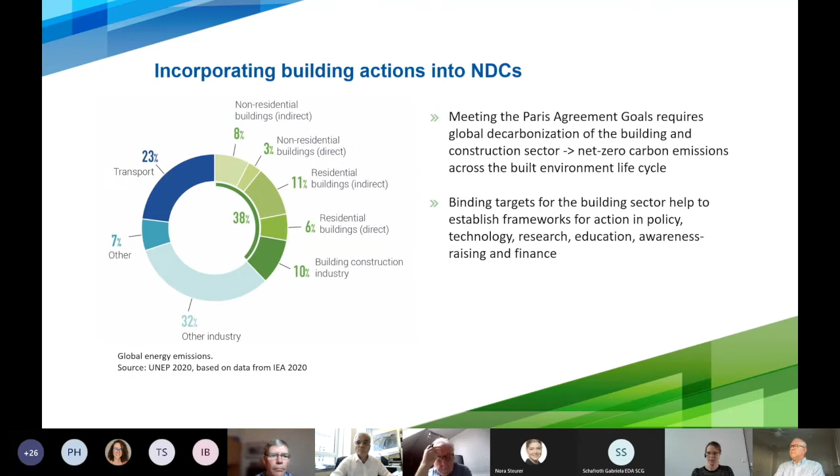So the relevance is given, and it really provides the opportunities—these NDCs—to somehow provide a framework for policy action and for different measures, which we are also highlighting later in this publication of the 10 key measures.

What are we looking at? As I said, we are looking at 5 key areas, depicted here in this landscape. The 5 key areas are new buildings, existing buildings, building operations, building materials, and resilience.

Why are we addressing these 5 ones? If you're familiar with the products of the Global ABC, usually we have like 8 key areas, also with the other ones being urban planning, appliances and systems, and clean energy.

We really wanted to focus on the ones on transformative action related to the building itself. That's why we kept it a bit limited. But of course, there are many interlinkages with urban planning, but also with appliances, etc., which are formulated in this global and regional roadmap. So it's not our intention to be very comprehensive, but really focus on what is close to the building itself.

What you also see on this graph is the circle around with these dots, which are possibilities of how policymakers, the target group of these publications, can address these key areas. Of course, by setting up policies, effective regulation strategies, which is one component, and then several enabling activities, providing targeted finance, capacity building, awareness raising, etc.

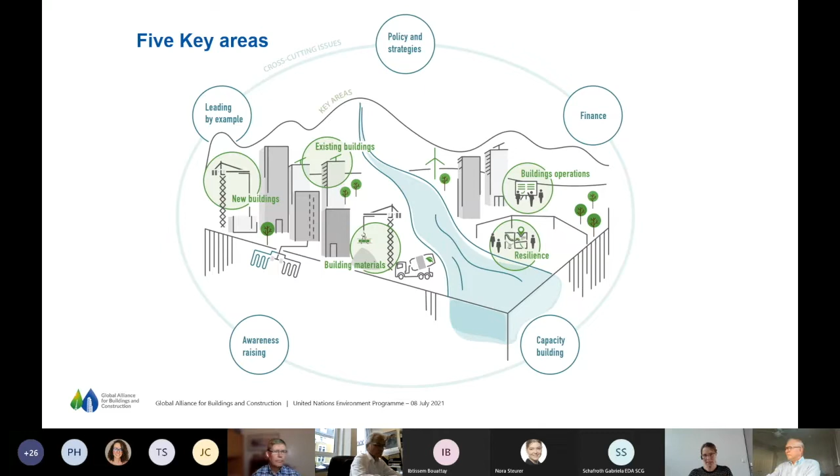And also by going forward by itself, leading by example with own buildings, own policies, etc., that all together shape this landscape. And it's shown as a circle to really show that these elements are interlinked and can also be combined.

So these are now the famous 10 key measures. I will go through all of them. This is just to give you a list of how we structure them. You see on the left these 5 key areas as icons, the 5 key areas we are addressing.

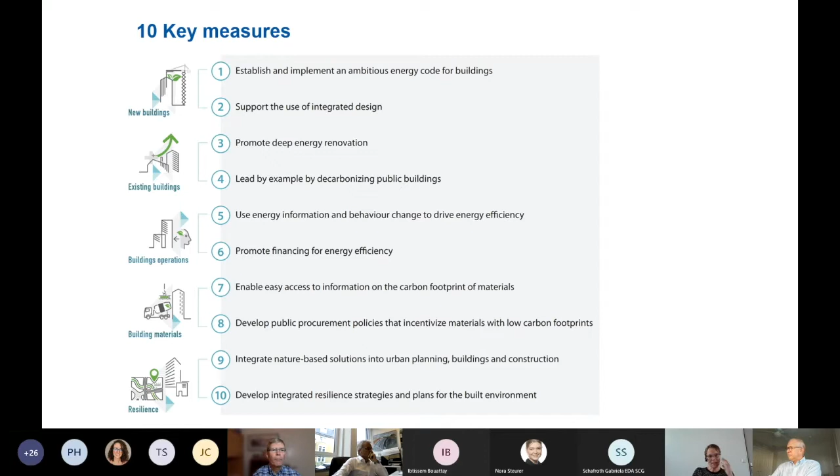And for every of these 5 key areas, we have selected 2 measures, which we said within this working group that these are key. And they also reflect these different roles of policymakers in shaping policies, in providing finance, in providing guidance and information, etc.

I'll start with the first one, which is also a core one: the establishment and implementation of ambitious energy codes for buildings. New buildings have a huge effect on building-related emissions, especially in emerging markets. Most buildings are not standing yet, so mandatory building codes are really important.

They set minimum energy efficiency standards for buildings. On the graph on the left, you see possible elements for these minimum standards. Mostly these are building envelopes. They can also be for other elements of the building, heating, ventilation, and air conditioning, setting minimum standards which are important also in view of future long-term energy demand of buildings.

Ideally, these building codes need to be ambitious, they need to be strong, they should also be improved progressively and implemented effectively, and ideally also moving from more voluntary energy codes to mandatory codes. And of course, ideally also broad in scope, that they cover both, for example, commercial and residential buildings.

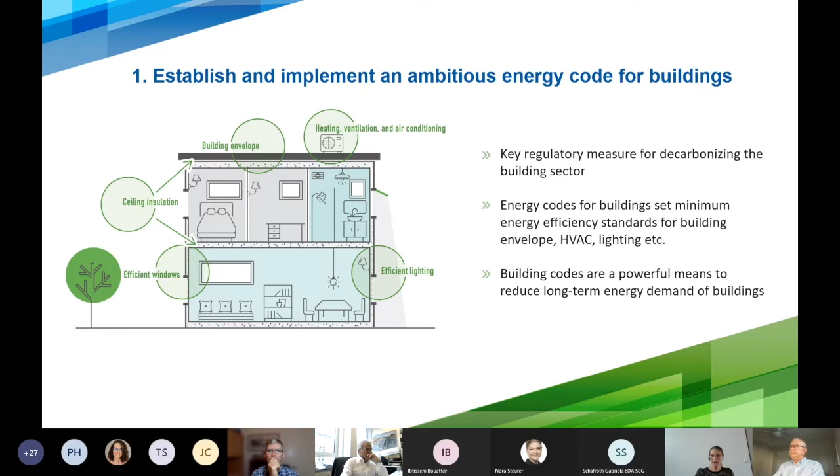I'll show one quick example. I will not show examples for all these key measures, but just to give an illustration, one example on building codes: the Eco Niwas Samhita in India for residential buildings, a building code established in 2018. The starting point was that the building stock is rapidly growing in India, and the use of air conditioning, appliances, etc., is growing rapidly.

And the share of residential buildings in terms of electricity consumption will also increase. So there is really a need to somehow address all the new buildings that are still being under construction and will be built in the future.

So this standard sets minimal building envelope design standards to limit heat gains in hot climates and heat loss in cool climates. And what is interesting here in this code is that it has an emphasis on natural ventilation and daylighting potential. It's also linked to passive solutions, which are also important in general.

The implementation lies with the state governments and urban local bodies. So it's of course a challenge to implement, but we felt that it was an interesting case, because it's a huge country addressing a huge number of buildings, the residential building area, and it has an important element, which is that it goes hand in hand with efforts to provide sustainable homes, affordable housing.

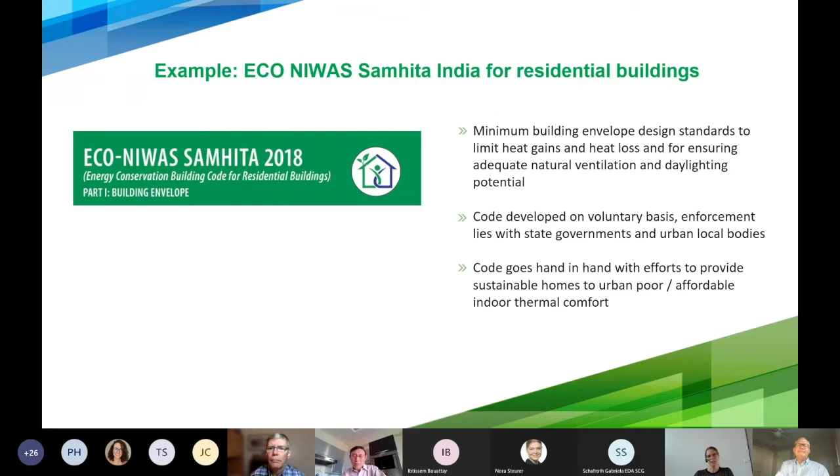And the implementation is also supported by easy to use compliance checks and tools, giving architects the flexibility to really use this code.

The second measure is support of the use of integrated design. Why did we select this? Designing buildings is quite complex, and if we want to meet net zero targets, it requires integration of different disciplines. This graph shows that if you start from the beginning using this integrated approach, working together between different actors - designers, real estate developers, manufacturers, contractors - it gives the possibility to really make a difference and have an impact in terms of reduction of emissions.

And the later you are in the life cycle of a building, construction and operation phase, the possibilities to make changes become more difficult. So supporting the use of integrated design is one of these key measures. Rating tools, certifications and standards come into play here, because they can assess and recognize buildings which go beyond regulatory compliance and meet a higher, greener standard. With these standards and certifications, we can contribute to supporting these integrated designs.

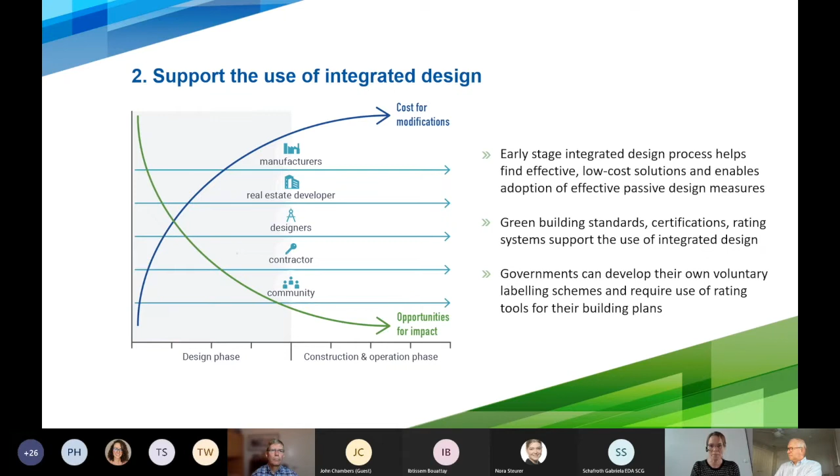We are moving now to existing buildings, and here energy renovation is an extremely important part. Existing buildings are to a large extent responsible for the increase of energy-related CO2 emissions, and the performance of today's buildings depends very much on the renovation rate. The renovation rate is sometimes very low - in Europe, for example, 1% per year. So here we have really a huge gap.

If we want to increase this renovation rate, it's especially an issue of ensuring adequate funding, and this is where we see the role of policymakers to ensure this funding and enable such renovations. Of course, it's a package that's needed - not only funding, but also regulations, obligations, etc. It all goes together, but the financing issue is what we wanted to highlight in this key measure. Policymakers can address this financing gap, helping reduce the high upfront costs of energy efficiency refurbishment, which are really a problem for many owners.

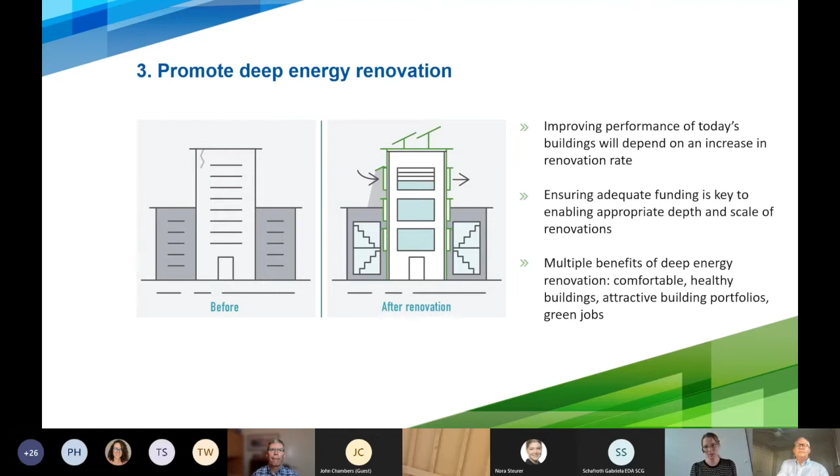Important also are the numbers of co-benefits of deep energy renovation - not only constructing comfortable and healthy buildings, but it's also attractive for building portfolio owners. It's important in the creation of green jobs, and especially now with all these recovery initiatives around the COVID pandemic, it has a role to promote deep energy renovation.

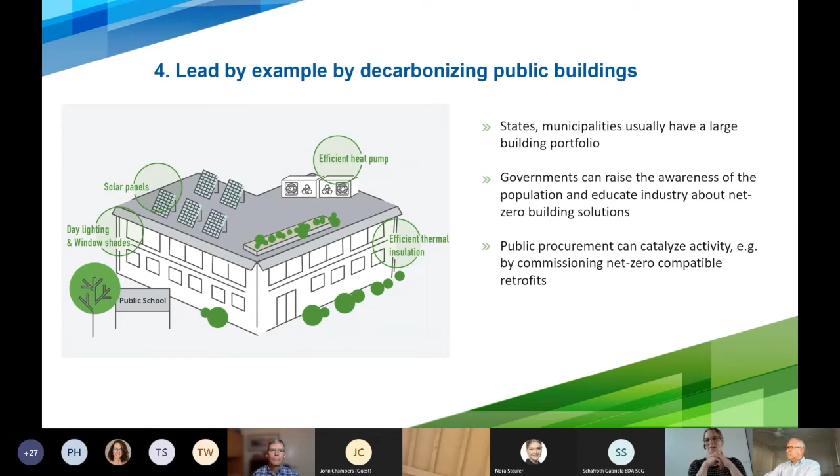In existing buildings, we also have leading by example by decarbonizing public buildings as one of the key measures. It's not only related to existing buildings, but states and municipalities usually have large portfolios of schools, hospitals, offices - there's a large potential to be an example for others to decarbonize their own buildings. It's not only that this measure can have an effect on their buildings alone, but also that governments can raise awareness and educate industries about such solutions.

We are moving to the area of building operations. This is an area that has often been neglected - the proper operation of buildings. There has been more focus on the design and the envelope, for example, and this measure is not focusing on technical options for optimized building, which is also important, but more on the behavior change of users. This is, of course, a challenging task.

The energy consumption behavior is not always rational, but there are interesting examples and programs, for example from energy utilities, to encourage people to save energy. This goes a lot through neighborhood benchmarking, customized recommendations. If you are aware of your energy consumption, compared to your peers, to your neighbors, it's seen as a first step to save energy and reduce overconsumption.

The other key measure under building operations is the promotion of financing for energy efficiency. These measures address the underinvestment in energy efficiency, and here innovative models such as energy as a service come into play, where consumers pay for their service, for energy or for cooling, rather than investing in physical products. This helps reduce overconsumption, and it also pushes suppliers toward more efficient solutions. So it's a positive option on both sides.

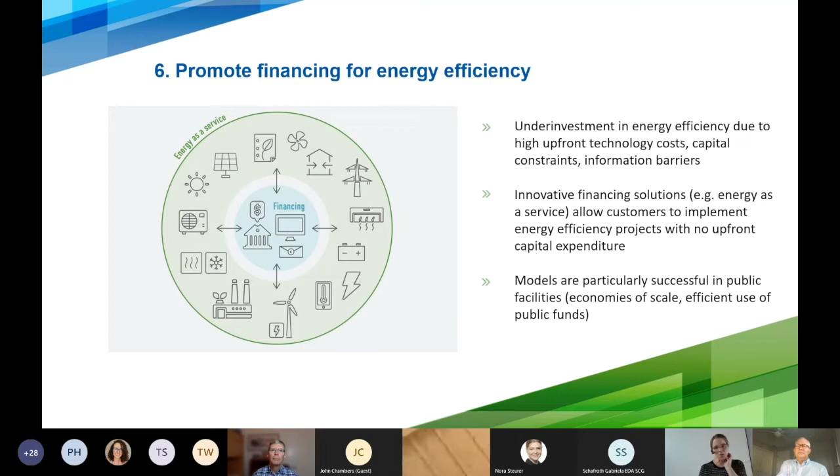In the key area of building materials, we have a key measure related more to information: enabling easy access to information on the carbon footprint of materials. The embodied carbon is a large share of the life cycle carbon footprint of buildings. In average buildings, it's about 10 to 20% of the whole footprint. And if we go to highly efficient buildings with very low or zero operational carbon, it can be even higher, up to 50%. So the relevance of embodied carbon is great, it's important, and it's increasing.

There are quite a few carbon calculator tools which help provide this information, and policymakers can use them in their own procurement policies and actions on green building materials, etc. But they can also empower others by providing trustworthy information, empowering designers, investors, etc., to make informed decisions.

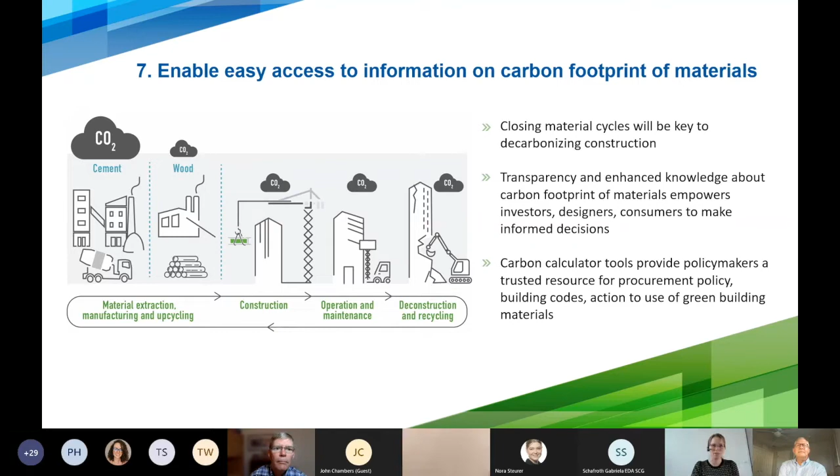Number 8, also on building materials: the development of public procurement policies that incentivize materials with low carbon footprint. Public procurement represents a substantial part of public expenditures. In OECD countries, it's 29% of government expenditures, so it's a large part of the expenditure.

Integrating green criteria into procurement has a high potential. You can make the buildings of states or governments more efficient, going in the direction of net zero. But it's not only about improving their own building portfolio—by integrating green elements through the whole procurement cycle, there's also an impact on others, driving innovation, adapting to low carbon materials at scale, and making a difference for the whole industry.

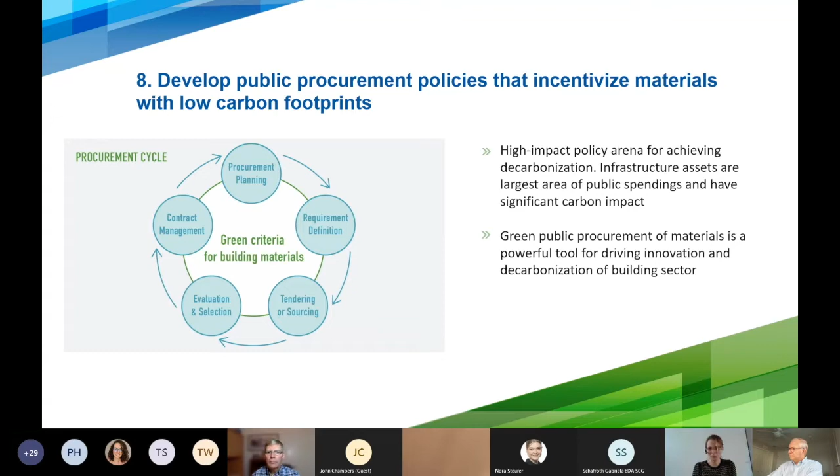One example is the Buy Clean California Act, which targets the embodied carbon of construction materials used by the state in infrastructure projects, roads and buildings, etc. This act has mandatory requirements for construction materials—they have to have a global warming potential equal or lower than an established level set by the state, which is very fixed.

It's actually in July of this year that these requirements are set, and all projects under a state contract have to fulfill this requirement. This act is also accompanied by educational programs and tools, which is very important to ensure that these requirements are adopted quickly.

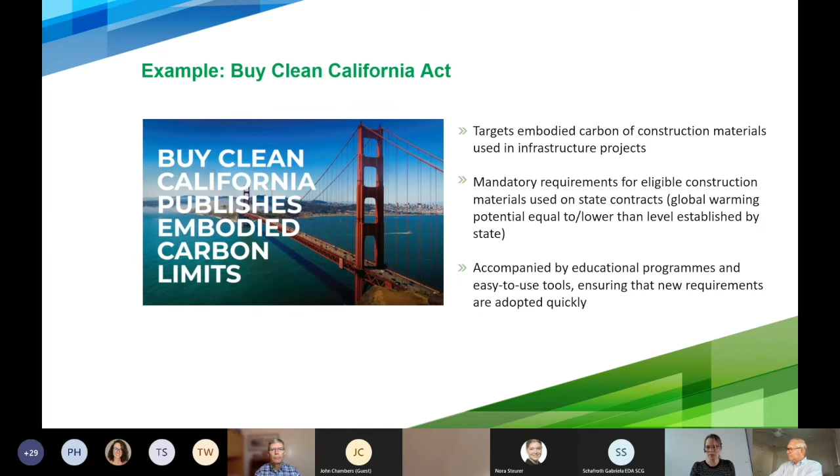And the last key area is resilience. Here we have one key measure: the integration of nature-based solutions into urban planning, buildings, and constructions. We wanted to open this up a bit and not talk only about decarbonization, but set it into context. Nature-based solutions are very important elements, as they can be implemented at different scales—at city planning level, shown here with green corridors, but also on individual buildings with green roofs, green facades, etc.

They have an enormous beneficial role in terms of enhancing resilience and reducing climate-related risks, as they reduce the urban heat island effect, help reduce flooding risks, and also increase carbon sequestration. So there are multiple benefits related to climate change, but also in terms of improved air quality, quality of life, etc.

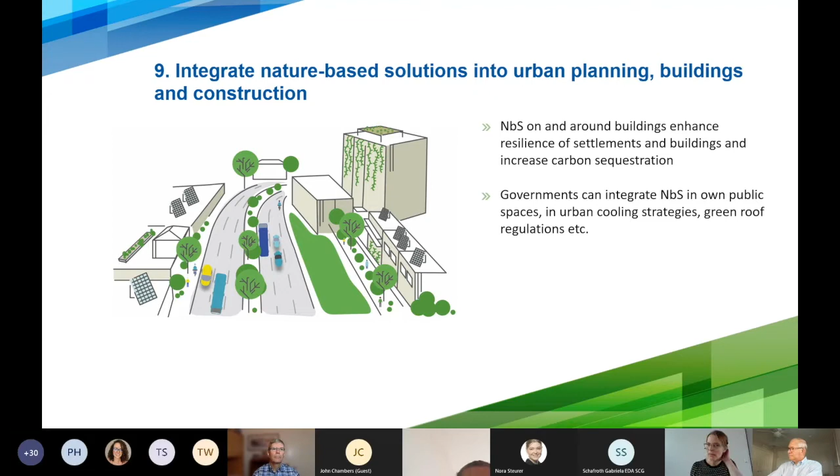So these are really solutions that can be applied at different scales and have very good benefits in general. Governments can integrate such solutions in different areas, of course, in their own public spaces, green spaces of cities, for example, but also in their strategies, cooling strategies, and also in green roof regulations. There are many examples and levels where these nature-based solutions can be included.

An example here again for these nature-based solutions, the green facades and sky gardens in Singapore. Singapore is, of course, facing strong density problems. It's really a small space, and green space is sometimes vanishing with development of new buildings. So the city has really started with a concept of a city in a garden, where the well-being and livability of the city is in the center. And Singapore is investing in green facades and sky gardens to improve the heat resilience and the resiliency.

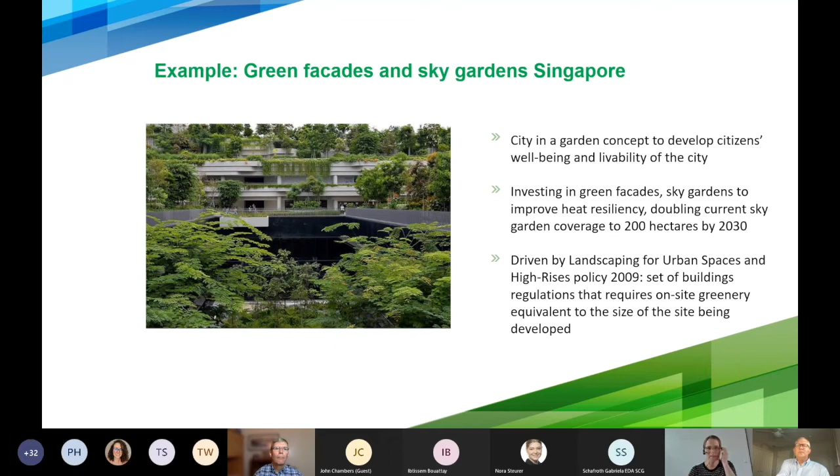And they also have a target to double the surface that is covered with green roofs. Interesting is the link with the policy landscaping for urban spaces and high rises policies that is already into force since 2009. It's like a huge program, and the strongest regulatory element is that there is a regulation that on-site greenery is required equivalent to the size of the green surface that is being lost when a site is being developed. So developers have to replace green spaces that are being lost by housing developments, but they have the ability to replace it also on the roofs and not necessarily on the ground.

Last but not least, the resilience, the 10th key measure, is the development of integrated resilience strategies and plans for the built environment. And here we really want to close the loop and make it the holistic view of buildings, which is important, that we not only address decarbonization, but resilience strategies in a comprehensive manner. Resilience promotes a holistic view of urban systems.

It considers both physical assets, socio-economic functions and structures, and then climate change and climate-related risk come into play. So having a strategy, risk assessments, etc., which are comprehensive, considering both the physical part and more the social part of a city is an important strategy to empower stakeholders to set targets, to enable communities also to adapt when faced with shocks or stresses.

And finally, the key message is what we wanted to say on all these 10 key measures. Important is this holistic approach that we want to cover the entire building life cycle, and this is required to move to a zero emission and resilient building sector and construction. It needs addressing all the key areas. It needs to include different actors, and it needs different approaches to reach this goal.